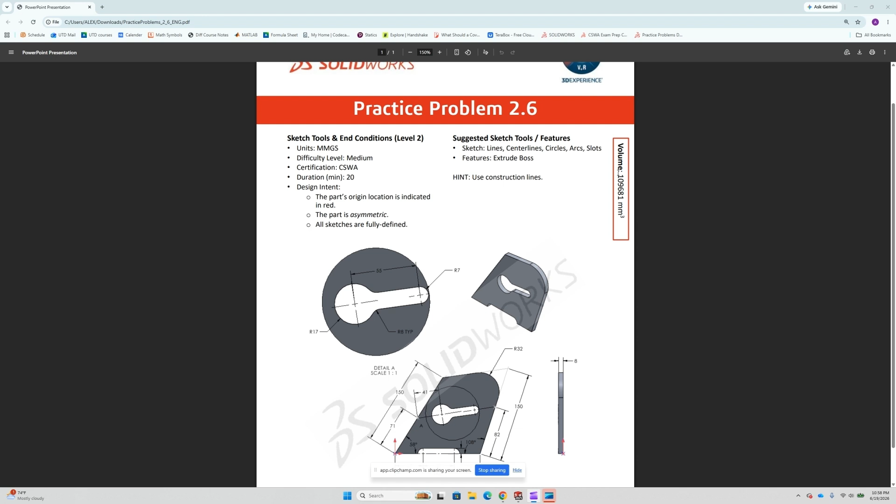And so let's get started. So first of all, we're going to set our units, metric MMGS. Then we'll start a sketch of the base profile in the front plane. Now the origin is centered at the bottom left corner. So first we'll draw a line like this, line like this.

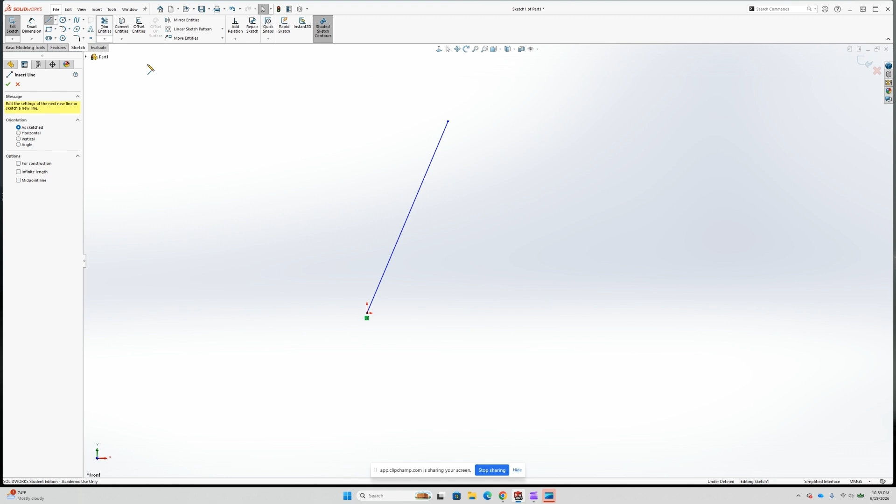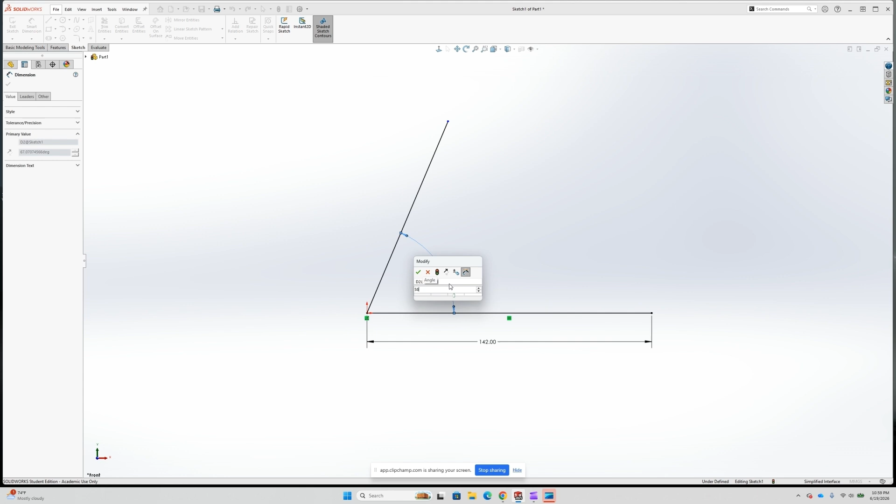Then we'll draw a horizontal line. And we'll just start there. We'll dimension them one at a time. Horizontal line is 142 millimeters. The angle of the line for the horizontal is going to be 58 degrees. And the length of this line is going to be 150.

And as for the other line, it's also an angled line. And its dimension for the horizontal is going to be 108 degrees. And its length is going to be 150 as well.

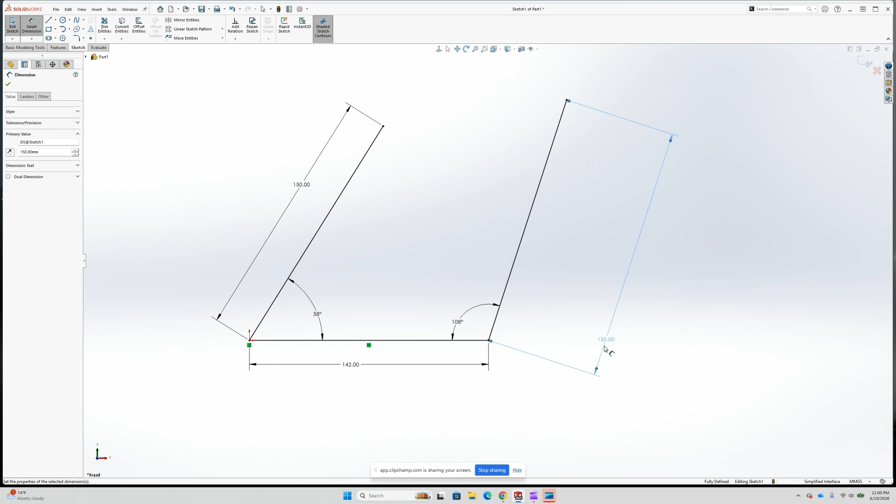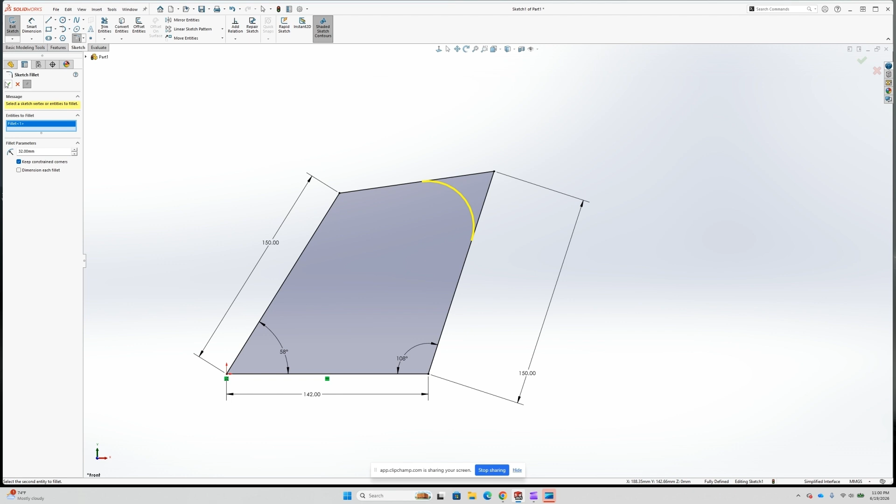And the reason we did it in this order was because the line at the top, we were not given its angle or its length, so you had to find its two endpoints instead via these two lines. So you just connect them. And last but not least, you add a sketch fillet of radius 32 to this corner. Select OK. There's your base profile.

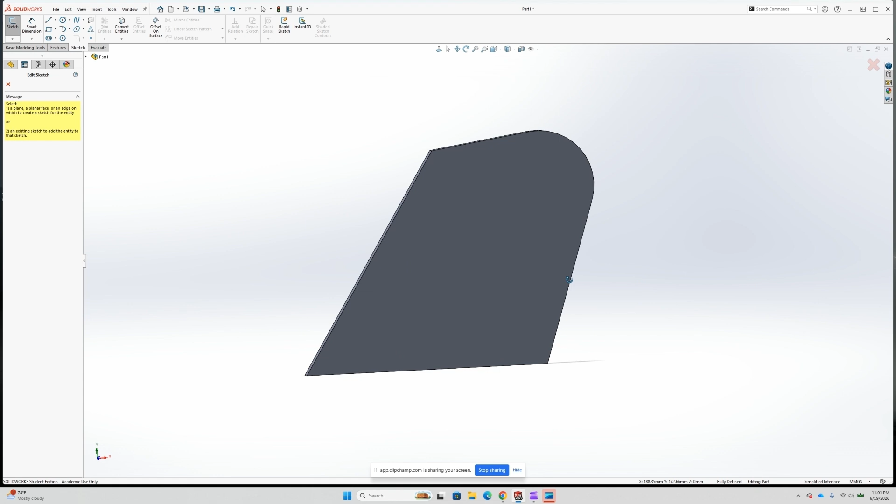Now we're going to extrude this by 8. And now for the interesting part, which is the cuts. So start a sketch on the front face. And let's start with the thermostat cut. We'll draw a center line, diagonal center line.

Now, just like before, this is a line where we don't know what angle it is with the horizontal, and we also don't know what length it is. But the one thing we do know is the endpoint dimensions. Oh, wait, sorry. This endpoint to the origin is 71.

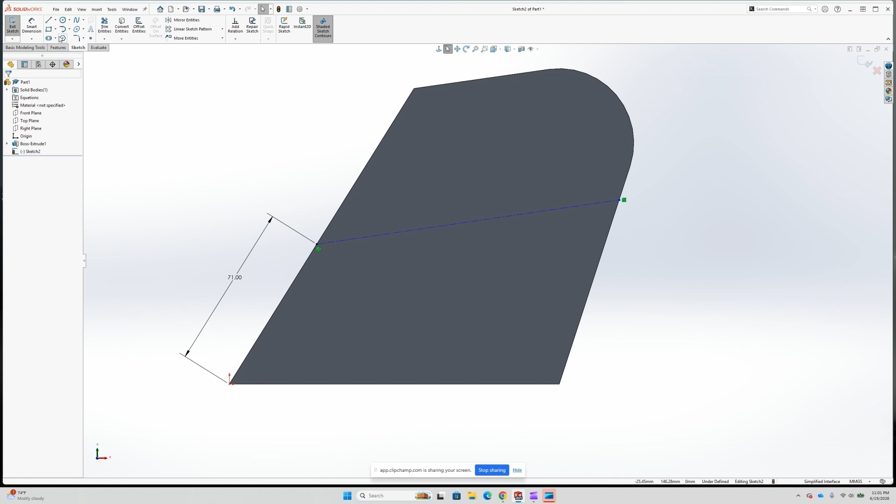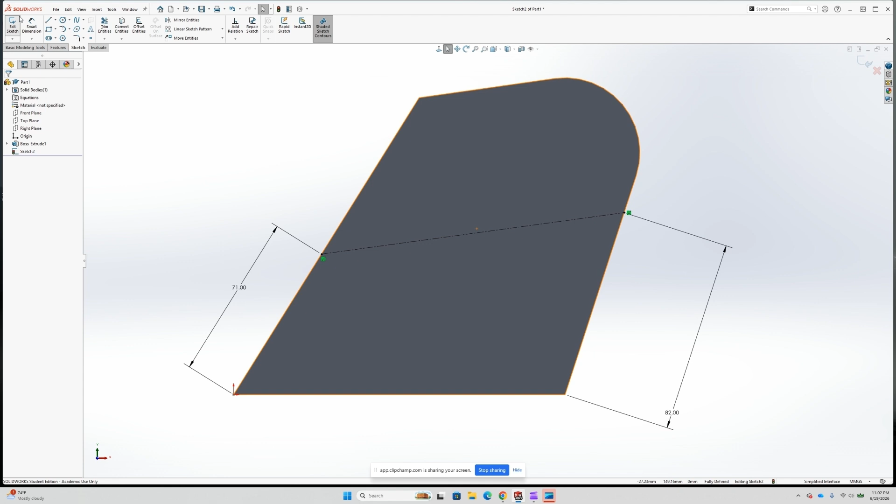And then this endpoint from this corner point is 82. So there's a center line you need. And I believe the thermostat is actually symmetric, so we can use that to our advantage. But we'll start with the circle at the top. Go like this.

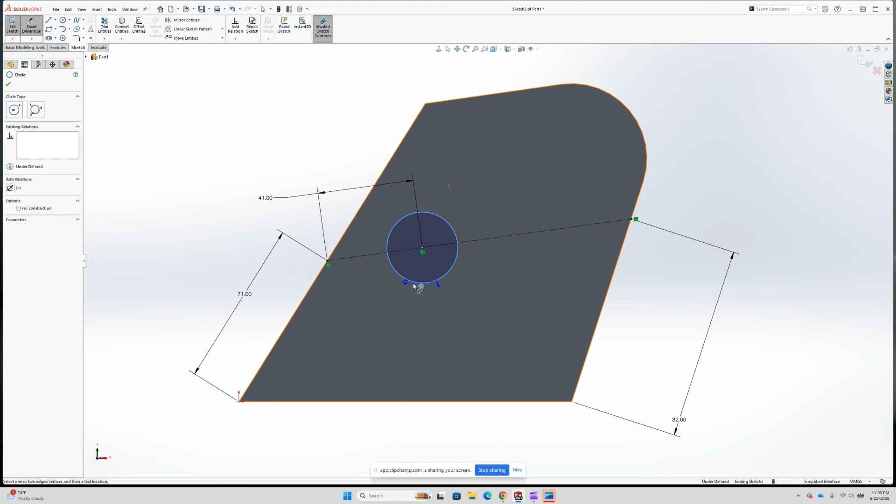The distance from this point to the center point is going to be 41. And it says the radius of the arc that this circle is going to make is 17. So we multiply that by 2, and we get 34. So the diameter is 34.

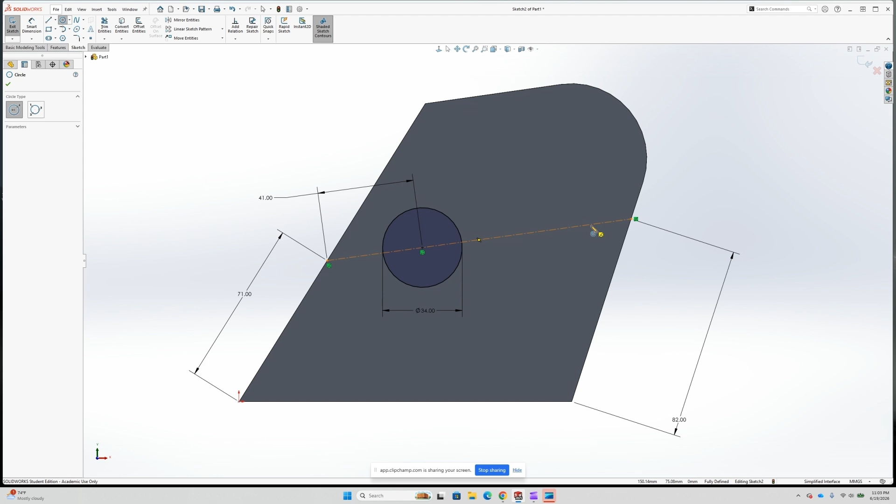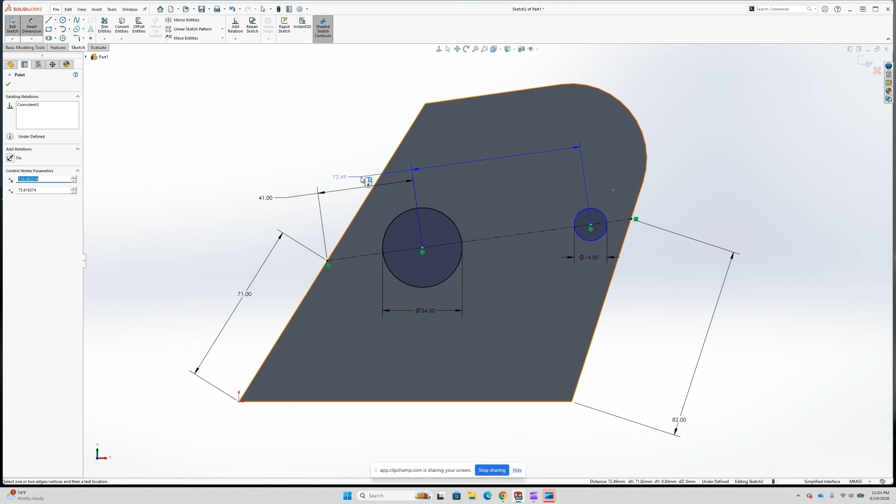And the distance along this center line between these two center points, oh, there you go. You kind of need to drag the dimension a little bit to get it to be parallel with the center line. The distance between them is 55. Now, then we're going to have a line into an arc.

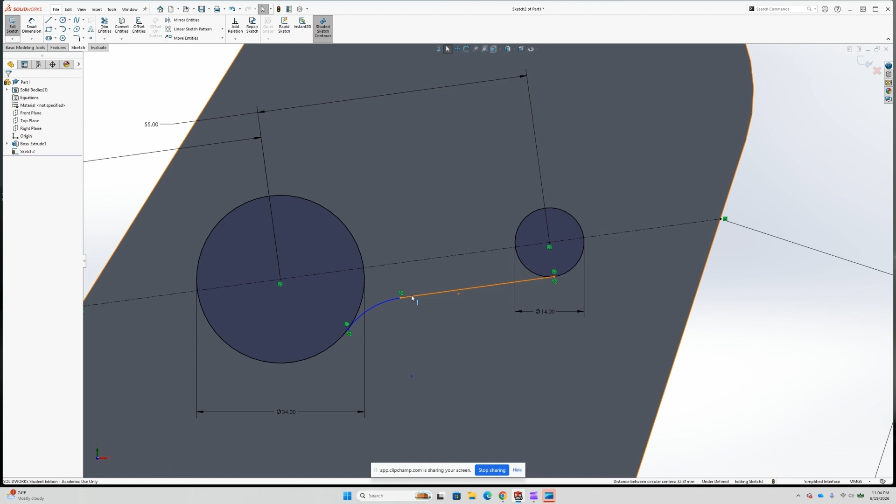Let's just do tangent arc, tangent with the line, then connect it with the circle, and then we will add tangent relations between arc and circle. There's already tangent relations between the arc and the line. This arc is going to be of radius 8. From the drawing, this straight line is meant to be parallel with the center line we created. So we're going to add a parallel relation.

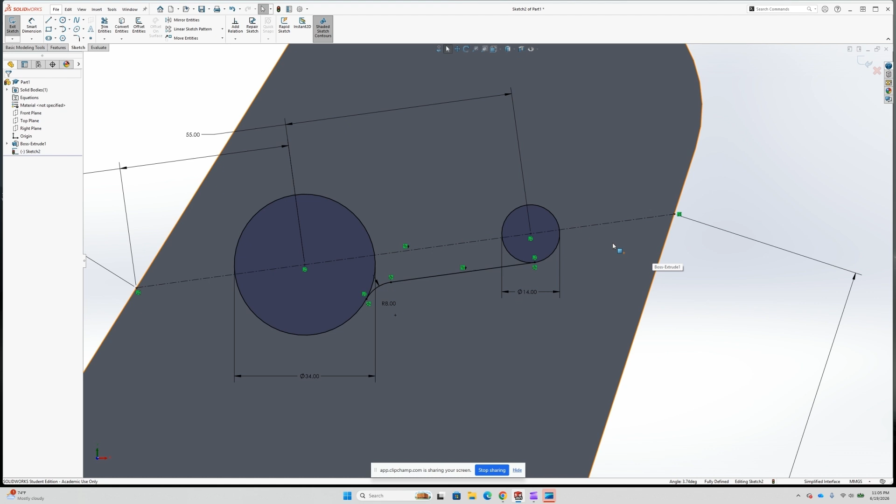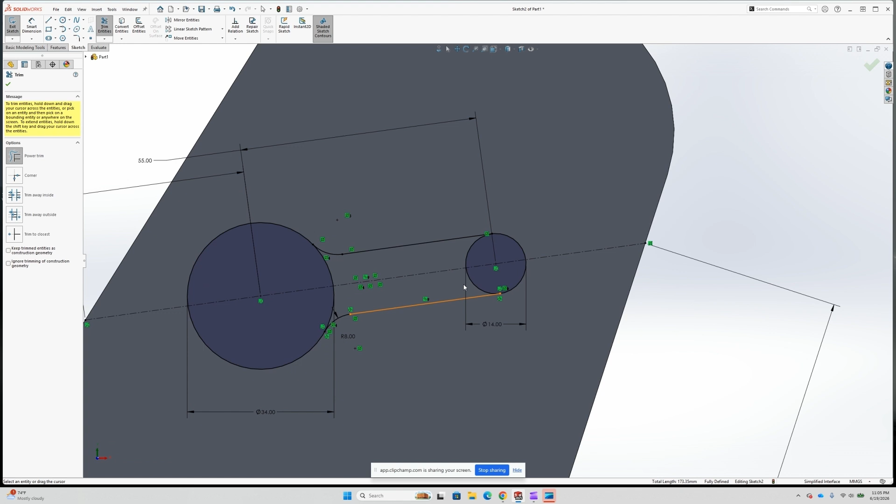That's fully defined. And since it's symmetric, we can use mirror entities for the arc and the line. We will mirror it about the center line. Check OK. That looks good. Then we'll use trim entities to make it all one shape, and now it's one cut. Now we can move on to the slot.

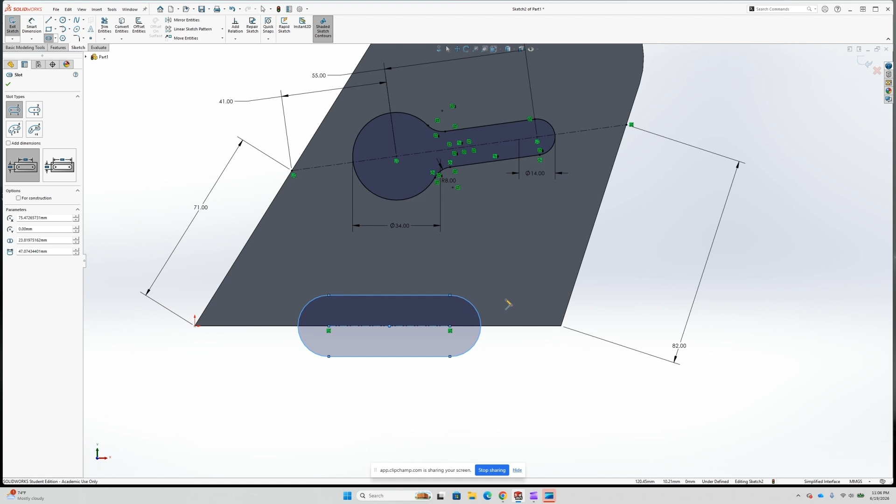When you're placing the slot, you place first the leftmost center point, then the rightmost center point, and then a random point on its circumference. We'll make sure the center points are coincident with the bottom edge. The distance from origin to leftmost center point is going to be 47. And the distance between the center points is going to be 52.

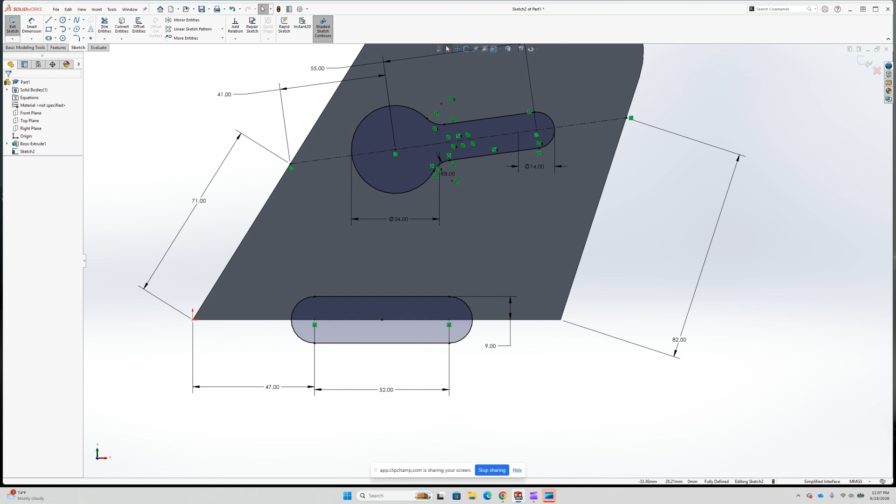And then the distance from the bottom edge to the top edge of the slot is going to be 9. And that should be the entire slot cut. Yes, that's it. So now we have 2 cuts. Now we can go to features, extrude cut, and we will just say through all. Select OK.

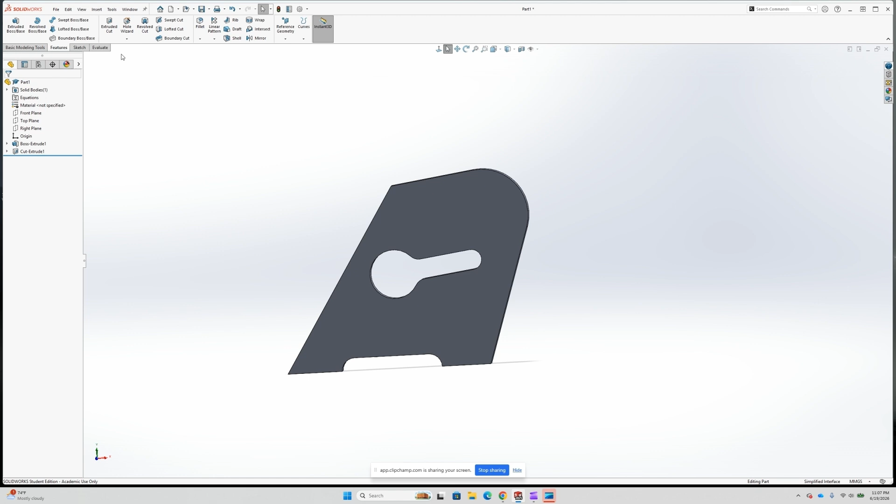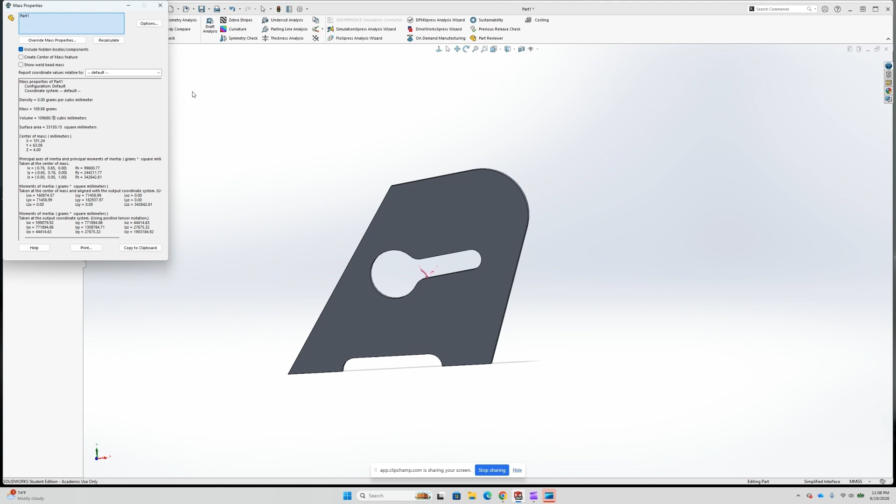Now we will check our answer. We have a volume of 109,681 cubic millimeters, which is the answer, as can be seen by the solution.